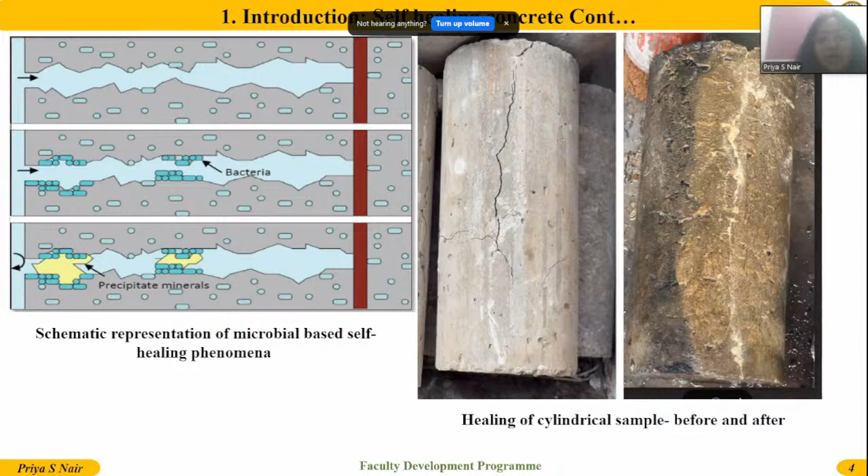So I just put this here for your reference.

There are a lot of literature reviews showing that bacteria is good for the mechanical properties, durability, densification, and reducing permeability. Many other mechanical and durability properties, as well as microbial self-healing properties, are produced by this kind of bacteria. So I'm not going much into the literature part.

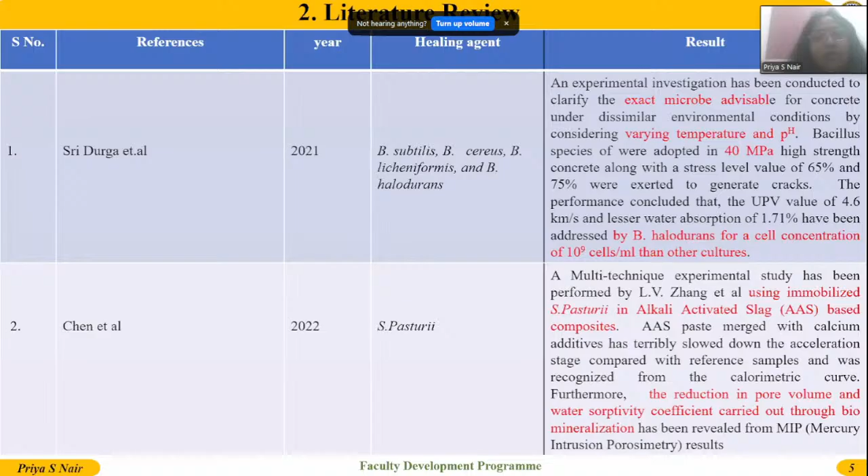Let's go to the next slide. So, research gap - what was my research gap actually in my thesis? I already told you I have taken two types of bacteria. Why I selected this is because most of the existing MICP, microbially induced calcite precipitation studies, rely on individual bacterial strains.

When I went through the literature, I reviewed around 250 plus papers. I noticed that most researchers focused on single strain bacteria. But very recently, I feel around 2020-23 onwards, some people are starting work on mixed cultures.

So what is the problem of single strain bacterial culture? We know that concrete has a pH of 12 to 14. In order to combat that kind of situation, the bacteria should withstand that harsh environmental condition, and we need to check their survivability, metabolic reactions, and precipitation of calcium carbonate inside that system.

So sometimes this single bacterial strain fails to achieve such objectives. Single strain may sometimes fail, so in that case we use co-cultured bacteria. In my research topic, I have taken two kinds of bacteria - one from ureolytic and another from non-ureolytic.

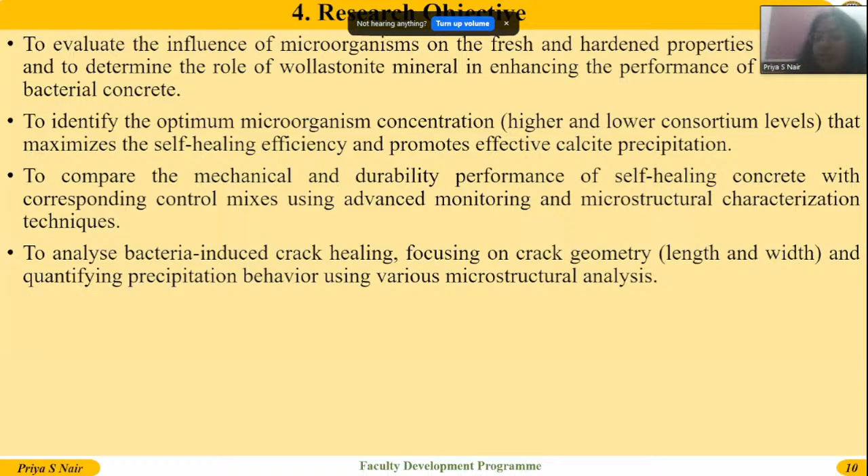The next slide covers materials and experimental program. These are the materials used for my study: cement OPC 43 grade Ultratech, fine aggregate which was natural river sand, coarse aggregate natural broken stone of 20 mm and 10 mm, and mineral additive wollastonite grade Kemolite H-3K, procured from Wolkem Industries Udaipur.

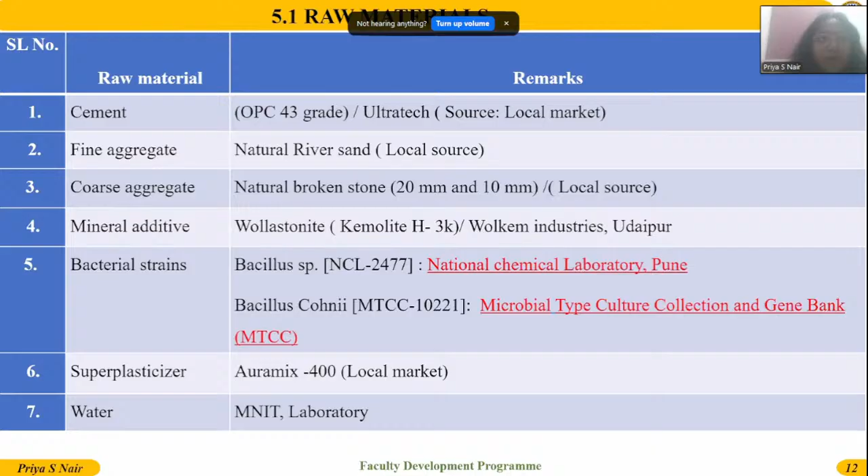Two types of bacterial strain were used: Bacillus sp NCL 2477 procured from National Chemical Laboratory Pune, and Bacillus cohnii MTCC 10221 from Microbial Type Culture Collection and Gene Bank, Chandigarh. Superplasticizer Auramix 400 was used, and water was taken from the MNIT laboratory.

All participants know the physical, chemical and other properties of the ingredients used, but I can discuss a few: fineness 1%, specific gravity 3.15, consistency 33%. Initial setting time was 90 minutes and final setting time was 220 minutes.

These are the aggregates used: 20 mm and 10 mm aggregates, with 60% being 20 mm and 40% being 10 mm.

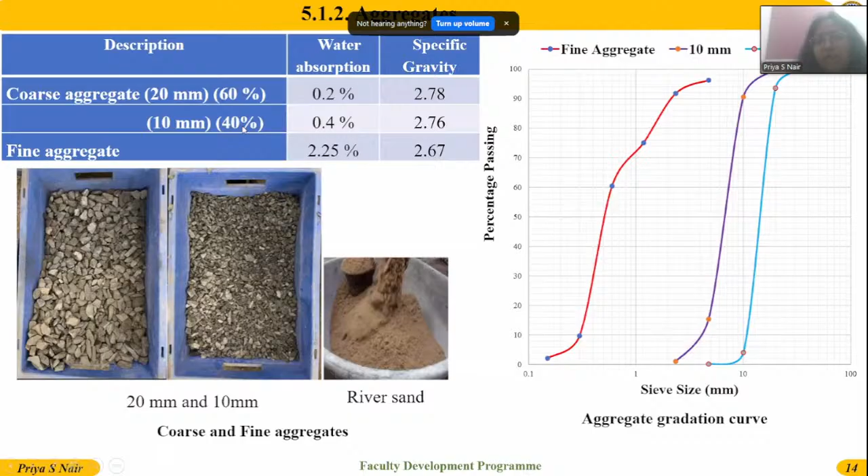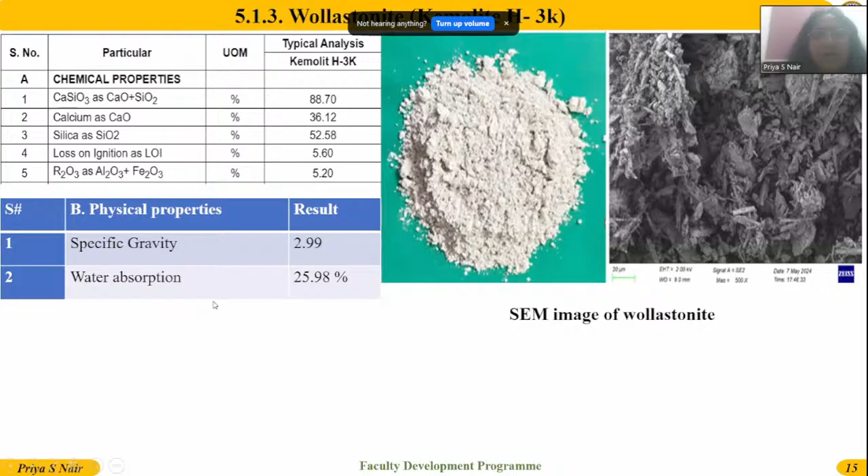This is the image of wollastonite. Its specialty is a needle-like, acicular form. When we use this kind of material, the bridging effect will be higher. It has applications other than concrete, like in paint and flux. Its specific gravity is 2.99, and the main thing is water absorption is comparatively more, at 25.98%.

The mix design was done per BIS 10262:2019, with a water binder ratio of 0.4. Optimum wollastonite used was 10% for this ratio. We conducted trials from 10% up to 50% by weight of cement, and found 10% to be optimum, giving maximum compressive strength. Superplasticizer Auramix 400 was used as discussed earlier.

0.3% was the optimum superplasticizer dosage, determined using Marshall cone test. The optimum consortium culture was 10% by weight of water, also determined through many trials.

Calcium nutrient employed in the current study was calcium lactate pentahydrate, at 1.5% by weight of cementitious material, also optimized through trial. Urea was 1 M, 18 grams per liter, also determined using trial.

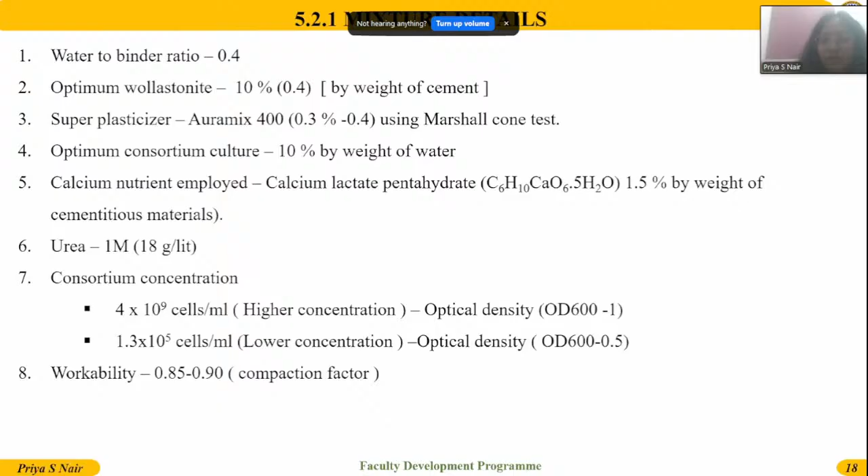When we add wollastonite inside the material, as I mentioned earlier, it affects workability, meaning water absorption is high. Whenever we added wollastonite inside the concrete, the workability sometimes reduced, so the SP dosage was varied. This happened because wollastonite has a larger surface area, so it requires more water to wet the material. So whenever we added the material, the workability got reduced, and that was maintained by adding SP dosages at various levels.

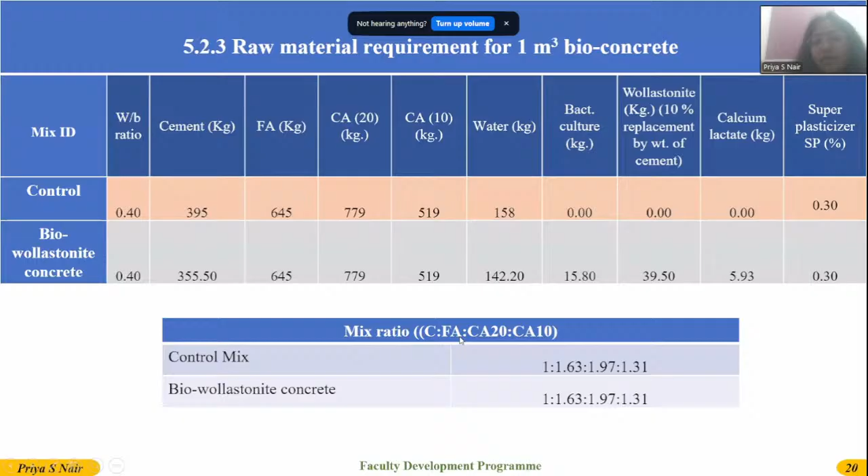So this is the raw materials requirement for 1 cubic meter of bioconcrete. This is the mix ratio: cement, fine aggregate, coarse aggregate 20mm and 10mm. These are the specifications for the mixes.

Next is the experimental methodology study on bacteria. For the study of bacteria, the first step was preparation of the nutrient broth. Before preparing a bacterial culture, we need to prepare the nutrient broth initially. The ingredients inside the nutrient broth include peptone, sodium chloride, yeast extract, HM peptone, and other biological components with the required composition, and it has its own pH of around 7.2 plus or minus 0.4. So before going to the preparation of the culture, it is in nutrient media only, with a pH of 7.2.

The second step is to sterilize the subculture, meaning sterilize the nutrient media. This was performed at 121 degrees Celsius for 20 minutes at 15 psi pressure for the preparation of the media.

This is the test we conducted for checking bacterial viability and related properties. These are the characteristics of the bacteria: first pH, second temperature, gram staining, then ureolytic assay, biofilm, calcite production, and endospores.

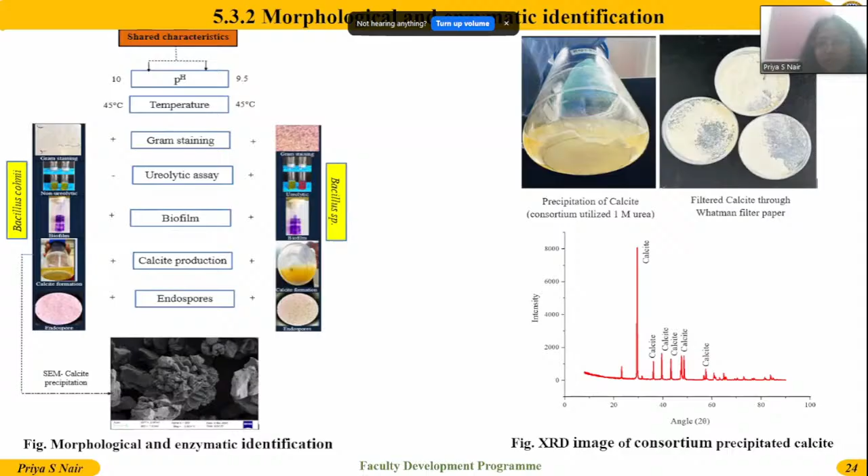So this is the nutrient. I have used calcium lactate pentahydrate. The concentration used in the trial was 0.5%, 1.5%, and 2.5% by weight of cementitious material, added in microbial concrete prepared with a 10% optimum consortium culture without urea addition. We found that 1.5% is the optimum.

These are the preparation steps of the bacterial culture. As already mentioned, we do streaking. Initially, we prepare the media and autoclave it. After cooling, before adding the bacteria, we adjust the pH to 10 using NaOH. Then we place the bacteria inside and put it in the orbital shaker for growing. After orbital shaking, the culture is taken out and the OD is checked using a spectrophotometer. Then it is ready for the production of bioconcrete.

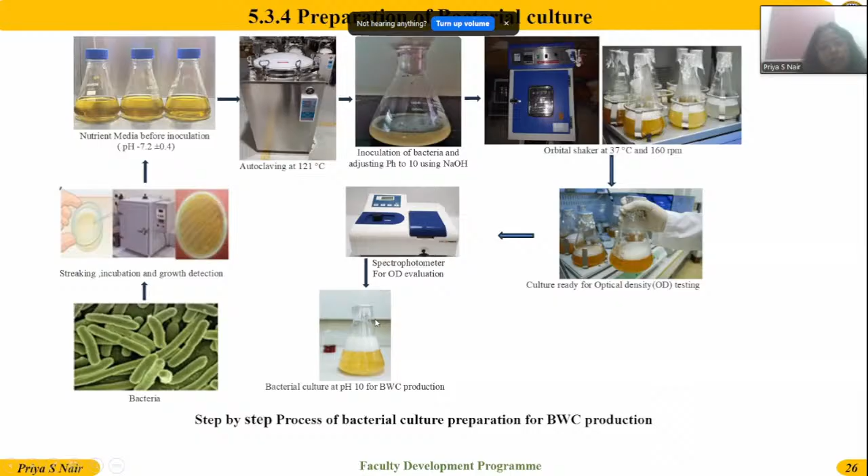These are the preparation methods. We used a cube, beam, and cylinder. There were many other things I could use, but I did not add much because of corrosion and shrinkage testing, everything I had already done. I did not add much because the slides would be too many, and it is very difficult to take the classes. So this is the...

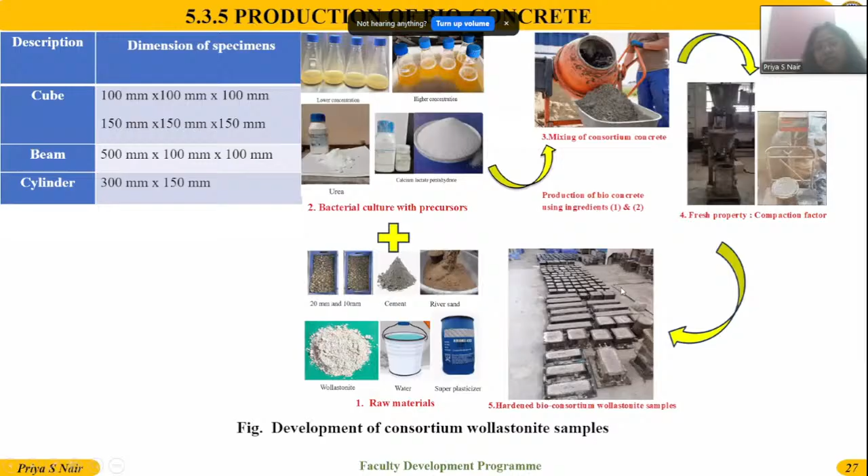Development of bioconsortium. These are the raw materials required. We added the urea and the calcium lactate for the higher and lower consortium concentrations. Then we mixed the materials and checked the workability, moving on to the hardened state of the bioconsortium wollastonite sample.

There are two types of activity I already discussed: ureolytic and non-ureolytic. In ureolytic MICP, urease-positive bacteria are present, which have the capacity to produce urease enzyme. This enzyme catalyzes the hydrolysis of urea into carbon dioxide and ammonia. The ammonia released is highly soluble and dissolves immediately in the water present inside the concrete pores and cracks. The ammonia reacts with water and directly produces hydroxyl ions, causing a rise in pH levels inside the system.

Under high alkaline conditions, the hydroxyl ions convert bicarbonate into carbonate. The bacterial cell wall is negatively charged and can attract calcium ions from outside. After calcium ions are attracted and bound to the negatively charged bacterial cell surface, the carbonate ions react with the surface-bound calcium, causing calcium carbonate to nucleate and grow on the bacterial cells, leading to crack filling and pore healing. This is the main mechanism happening in ureolytic MICP.

There are three polymorphs of calcium carbonate: vaterite, calcite, and aragonite. Of these, calcite is the stable form. First, a crack occurs, then water ingress happens, followed by bacterial activation, urease production, urea hydrolysis, carbonate formation, calcium carbonate precipitation, crack sealing, and finally pore densification.

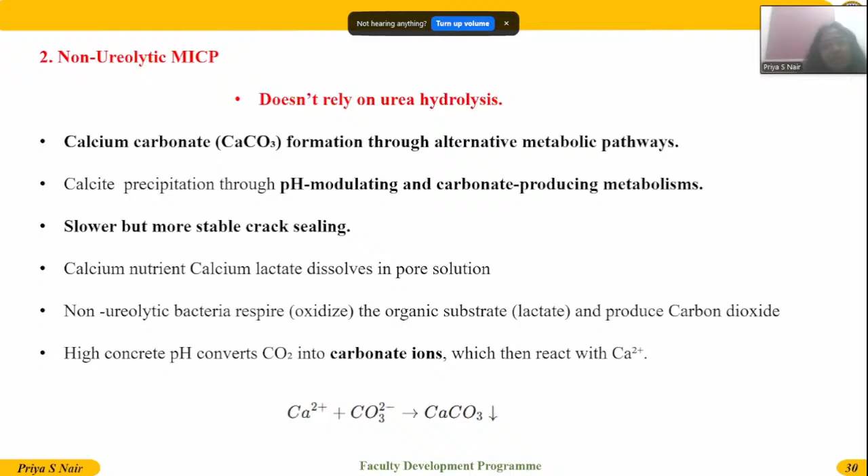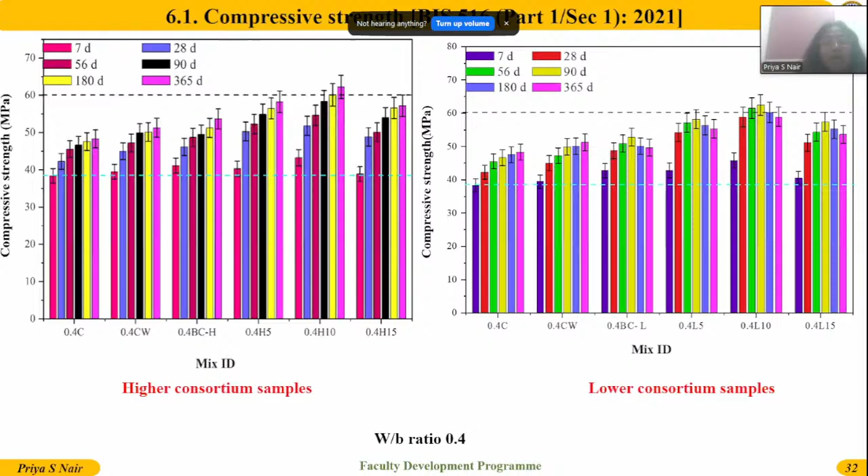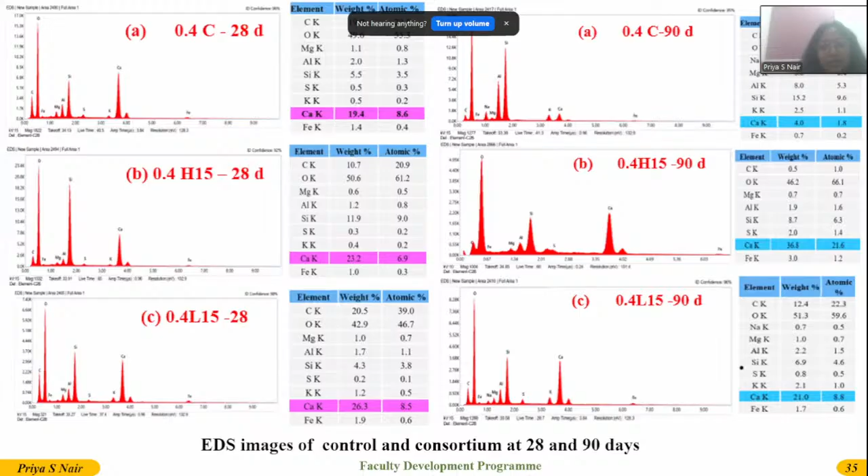So this is the EDS figure. Comparing the EDS at 28 and 90 days, we can see that this calcium precipitation was there.

So it was seen that compared to the control at 28 days, the specimen gave a strength increment of 42%. In the case of lower consortium, it was 42.99, approximately 43%, and higher consortium was 32.87%. So lower consortium gave the maximum result at 28 days.

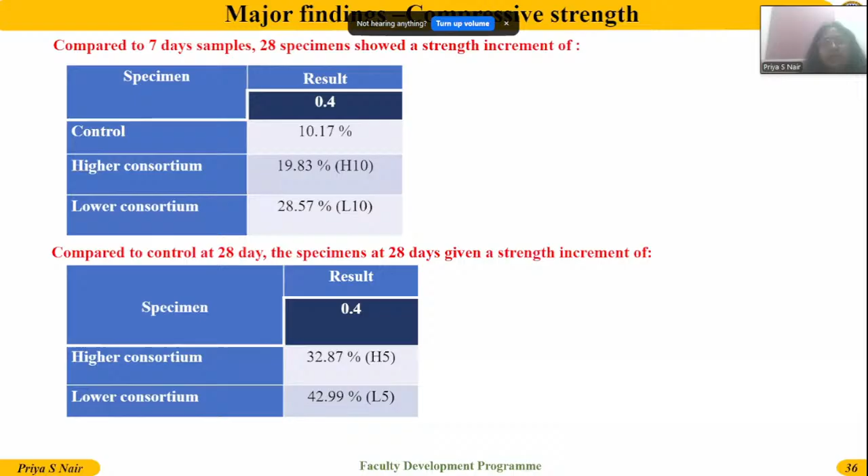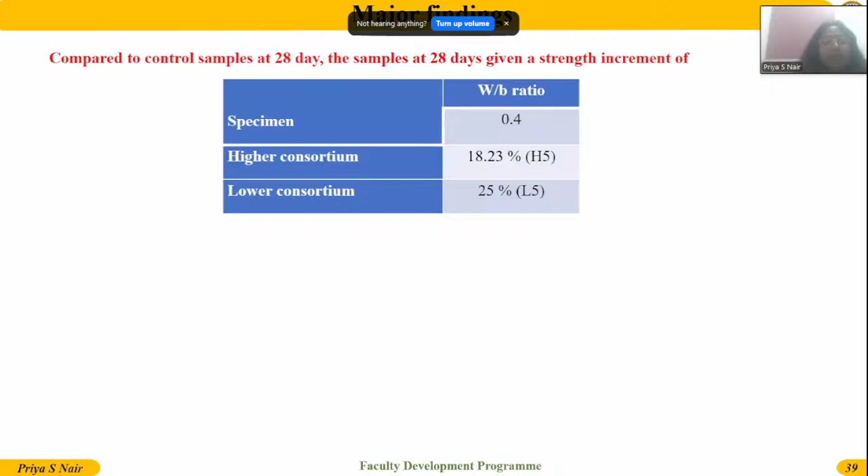Only I added the 28 days result. This is the same trend that happens in the case of flexural also. So in flexural, this is the figure, and lower consortium has given maximum result of 25%, and higher consortium 18.23%. This is the split tensile strength - the same scenario happened there also.

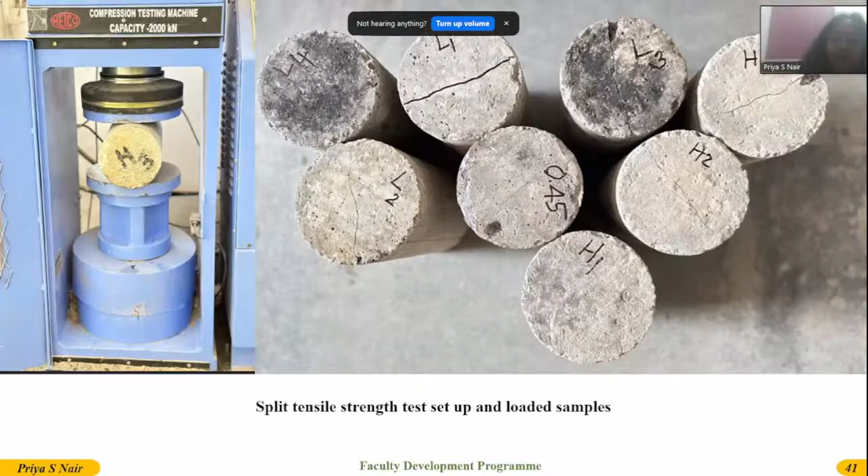This is the figure showing. So the lower consortium has given 31.25%, and the higher consortium has given 25.26%. This is the depth of wear.

So I have done two types of comparisons - 28 days and 90 days strength. Then I noticed that after 90 days, the depth of wear was reduced, and that was prominently seen in the lower consortium samples.

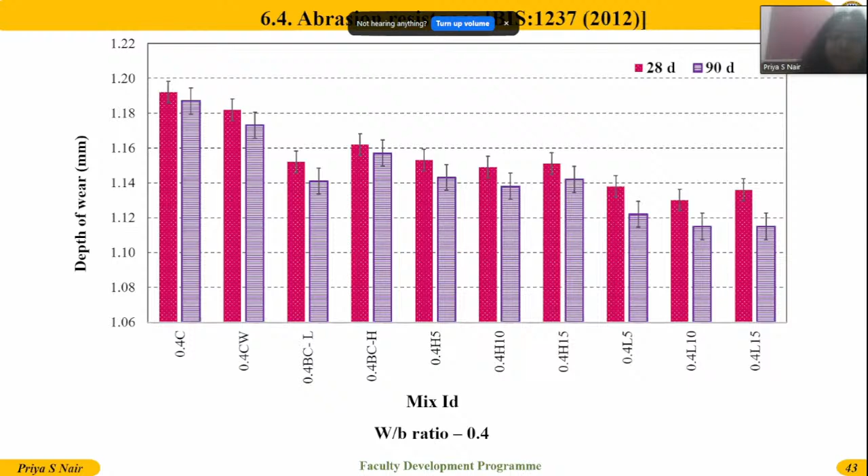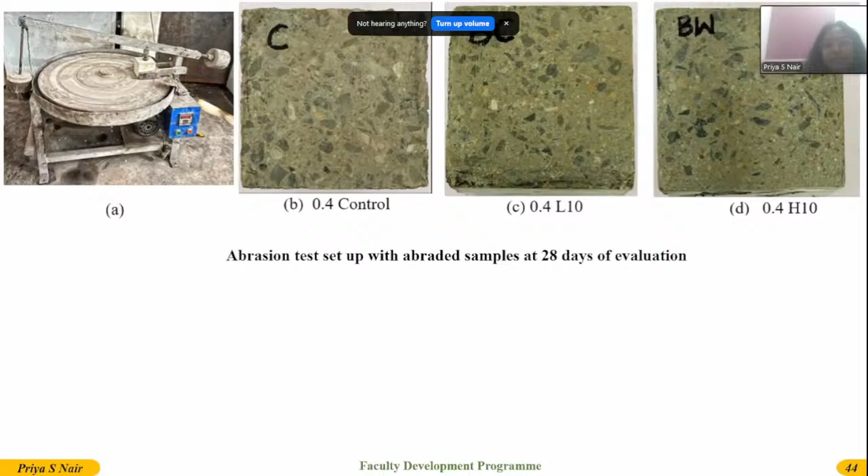This is the sample shown. This is the abrasion testing machine, and these are the samples. How we find out is, initially we take the weight of the specimen. Then after the abrasion, the weight change will declare how much is the depth of wear. There is an equation we use to understand the depth of wear.

So what we get is, comparing control samples at 28 and 90 days, a 0.42% reduction was seen when compared with the control. But higher consortium showed 0.96%, and lower consortium showed a 1.33% reduction.

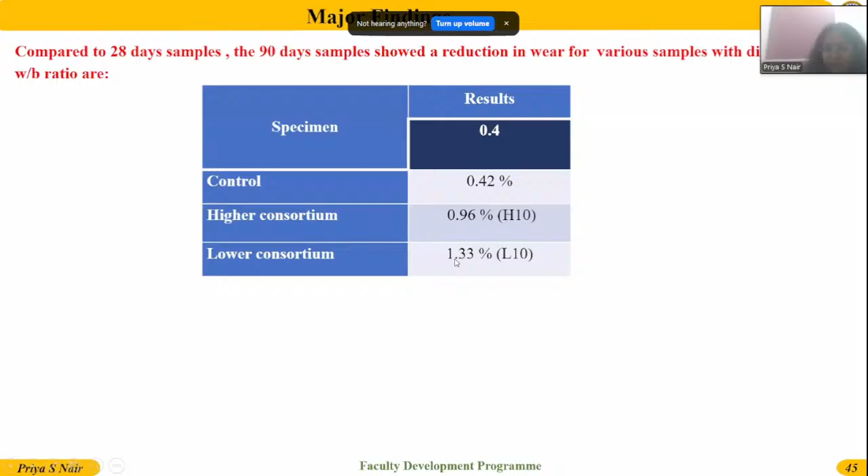So for durability studies, we are going to study water absorption, capillary ingression, resistance to acid attack, chloride penetration, behavior at sulfate environment, and behavior at high temperature.

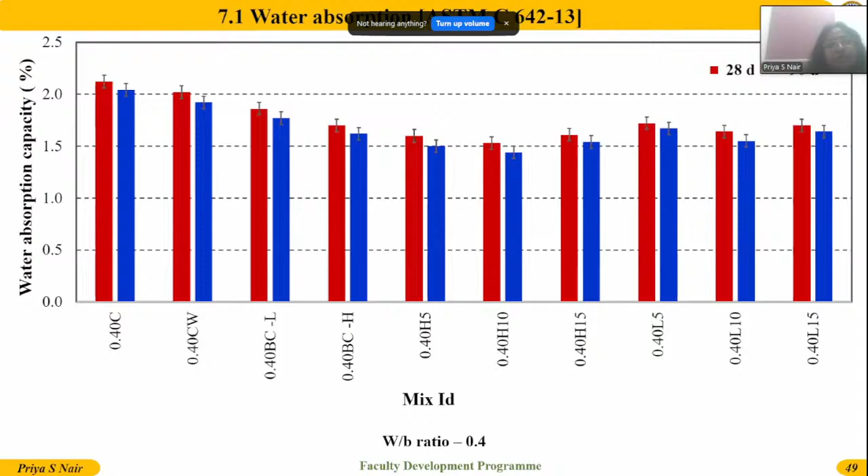Here I am showing the 28 days and 90 days water absorption. It was noticed that compared to 28 days, at 90 days it has reduced in every aspect, and it was mostly reduced in higher consortium samples, because as we told, in the case of higher consortium samples, the durability will be high because the cell density is already higher, and as it keeps increasing, the bacteria has the ability to endure such situations better than the lower one.

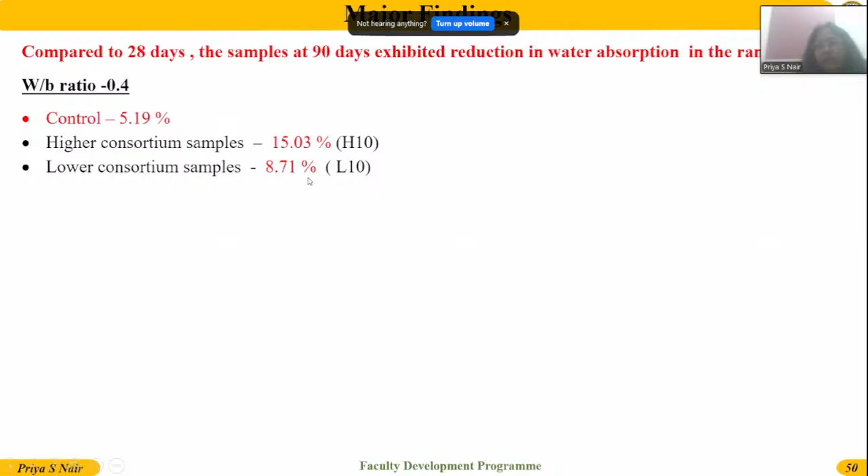So how was the result compared to 28 days? The 90 days sample exhibited reduction in water absorption in the range of: control 5.19%, higher consortium sample 15.03%, lower consortium sample 8.71%. So this is the sorptivity.

Then for sorptivity, we determined the initial and final sorptivity. Up to 6 hours, the initial sorptivity was taken, and after that, up to 6 days, the secondary sorptivity was taken. In the case of higher and lower consortium samples, we saw very tremendous changes. The higher consortium has lower secondary sorptivity than the lower one. This is the experimental way.

This is the sample for sorptivity testing. For the cube, 4 sides will be blocked, plugged with wax or something, and 2 sides we will leave open. So it is placed in water. This figure gives the maximum hint of how we do the sorptivity test.

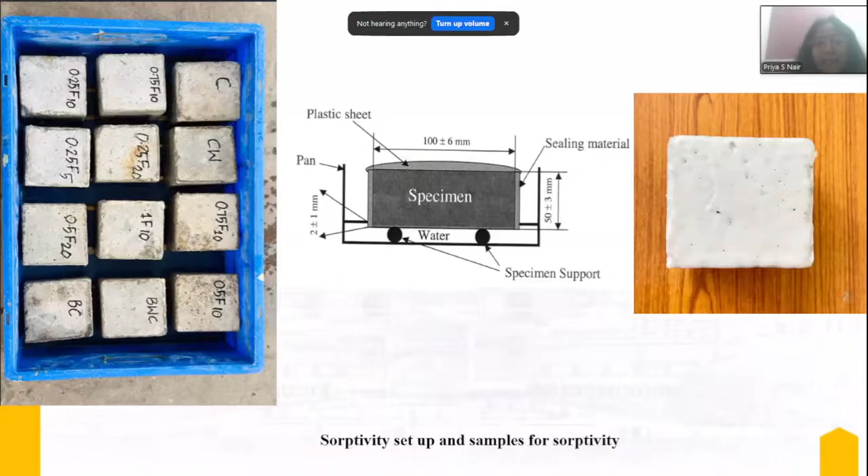The variation in secondary sorptivity was evaluated to assess the long-term surface water absorption characteristics of the concrete specimens. It was observed that by the end of the 6th day, secondary sorptivity had significantly decreased across all samples, with a more pronounced reduction noticed in the bio-treated specimens, demonstrating their enhanced resistance to prolonged water ingress.

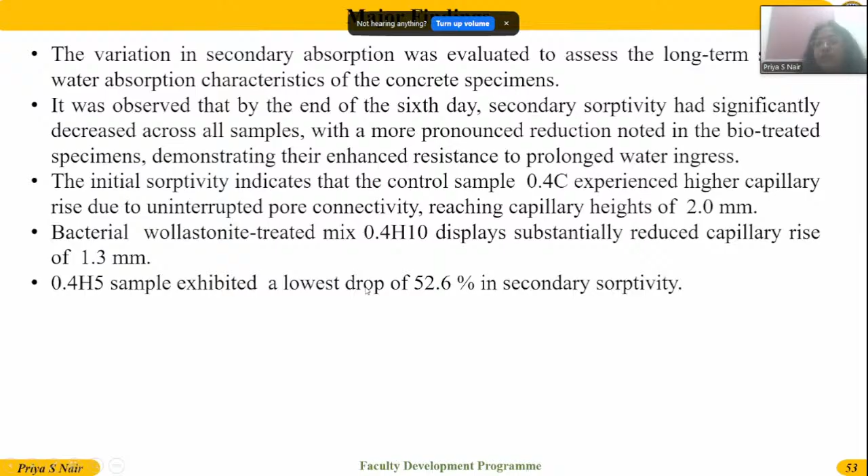In the initial sorptivity test, the control samples showed a maximum capillary rise of 2 mm, but the bacterial concrete showed only 1.3 mm, that is shown as 0.4 H10. Also, the 0.4 H5 sample exhibited the lowest drop of 52.6% in the secondary sorptivity.

Resistance to acid exposure was also tested, including compressive strength and weight change. We placed oven-dried samples in 3% diluted acid water and conducted tests at 28, 56, and 90 days. We checked the strength and weight at every duration, and we observed changes after 90 days.

During the acid test, what happens is the sulfuric acid reacts with calcium hydroxide in the cement to form gypsum. This gypsum is not good; it softens the interior part of the concrete structure, creates pores, and also makes the concrete expand, causing volume change.

When the gypsum reacts with calcium aluminate, which is one of the hydration products present, it forms a needle-shaped morphology called ettringite. This ettringite causes further expansion of the product and leads to major and minor cracking on the surface.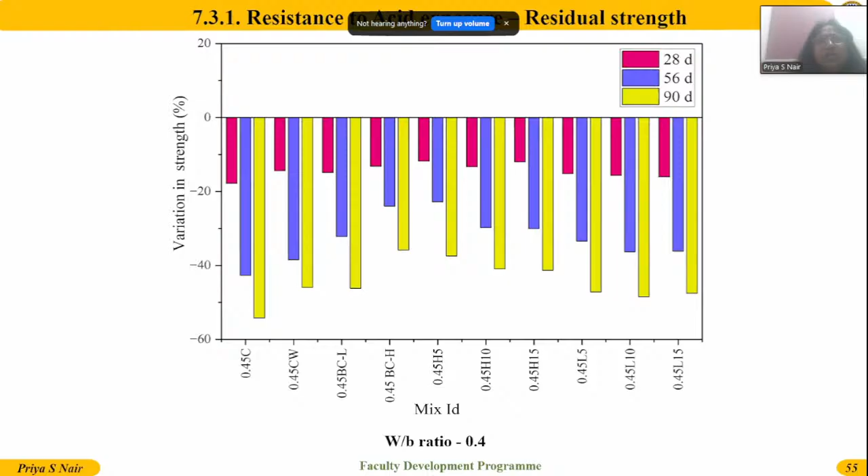In my case, I noticed that the Wollastonite consortium synergy showed a very limited weight change and strength variation. So we can say that MICP is an effective approach in the chemical aspect.

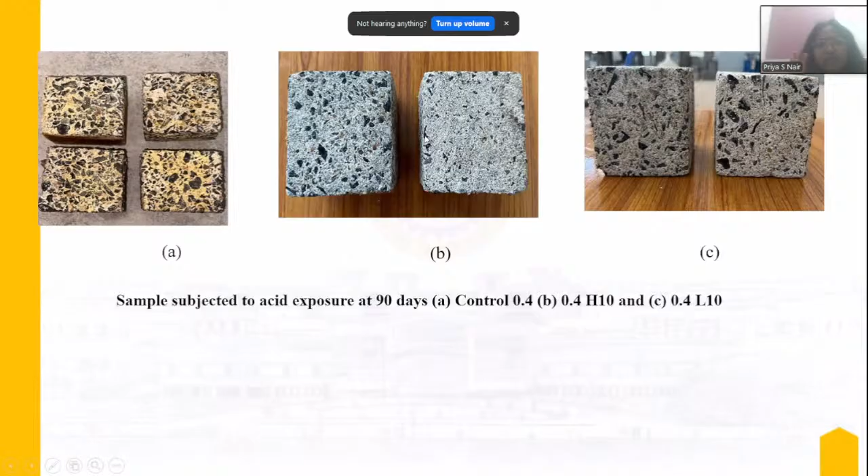These are the images: this is the control, this is the higher consortium concentration, and this is the lower consortium concentration after 90 days. We can see that the control is more vulnerable, more susceptible to this acid attack, but the others are not much affected.

Compared to the 28-day water-cured sample, the acid-treated samples at 90 days showed: the higher consortium showed 35.01% strength reduction, and weight reduction was only 3.12% compared to others.

This is the depth of penetration of chloride, meaning the depth of chloride penetration. We conducted an experiment on chloride penetration. We placed the samples inside a 4% NaCl solution for a period of 28 to 365 days.

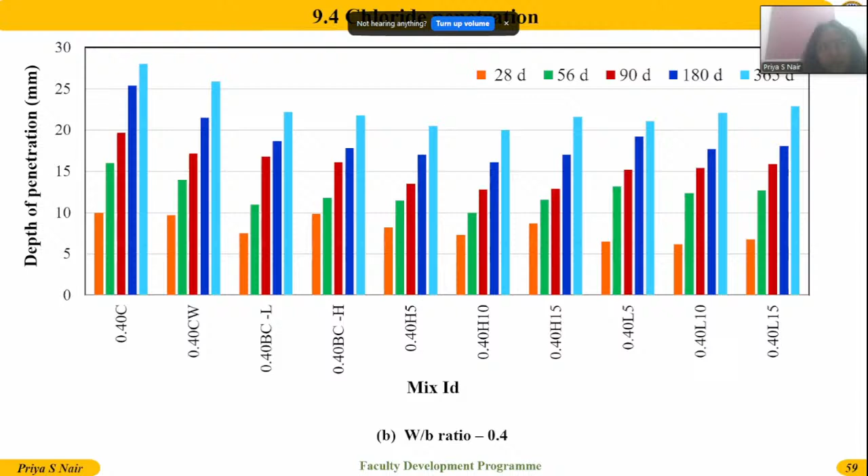At every duration we took the samples out, made two halves, and sprayed silver nitrate over the surface. The samples with chloride ingression show white precipitation. These images show the white precipitation.

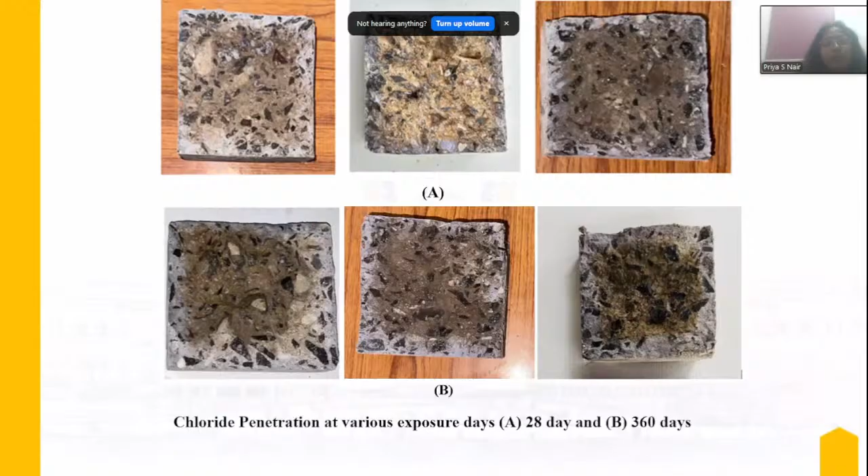We can see this is the 28 days, and this is 360 days. The 360-day samples show much more white precipitation, which indicates the depth of penetration. So we are taking the average of the depth of penetration.

It was noticed that the control sample shows a maximum of 27 mm at 360 days. The higher consortium shows 20 mm maximum, and the lower consortium shows 22.9 mm.

When magnesium sulfate reacts with calcium hydroxide, magnesium hydroxide, that is brucite, is formed plus calcium sulfate. This calcium sulfate later converts to form gypsum, which is not good, as it reacts with the sulfate ions in the concrete plus the aluminate phase to form ettringite.

The magnesium ion attacks the CSH gels and forms a different compound. There it was CSH, and here it becomes magnesium silicate hydrate, which has no binding capacity, and it causes severe strength loss and weight loss.

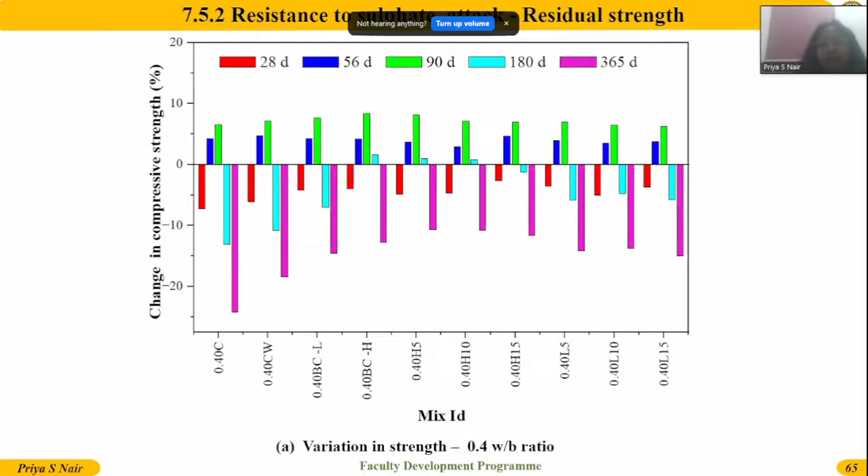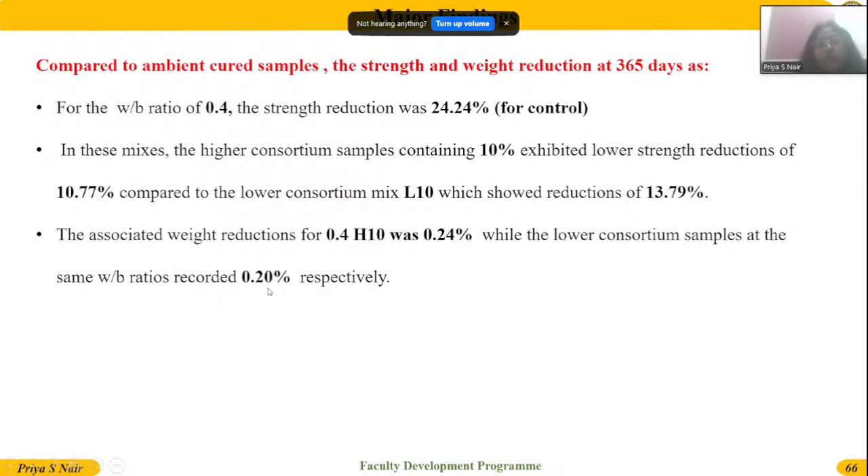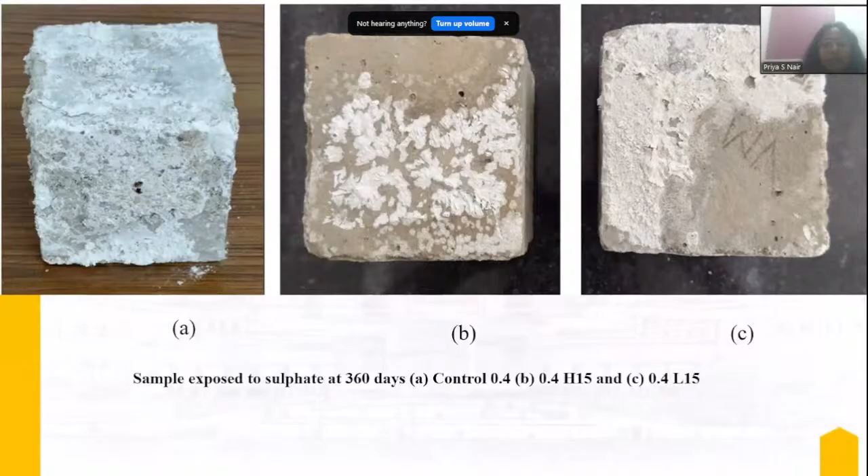These are the images of the control as well as the sulfate-exposed higher and lower consortium samples. I extended my work up to 550 days and noticed that the higher and lower consortium samples did not show any visible changes and were not degraded. Something may have happened inside, but it was not visibly shown as cracks, delamination, or spalling.

There was nothing, so this is the heat. The time is 7:06 now. I do not know how much time I can take because some materials are there, but okay, I can take whatever is needed.

It will make some kind of color change inside the concrete system. So it was seen that at 400 degrees Celsius, the reddish color was noticed, and after that, the concrete showed a gray color at 600 to 800 degrees Celsius, and at 1000 degrees Celsius it was a buff hue. This was clearly noticed.

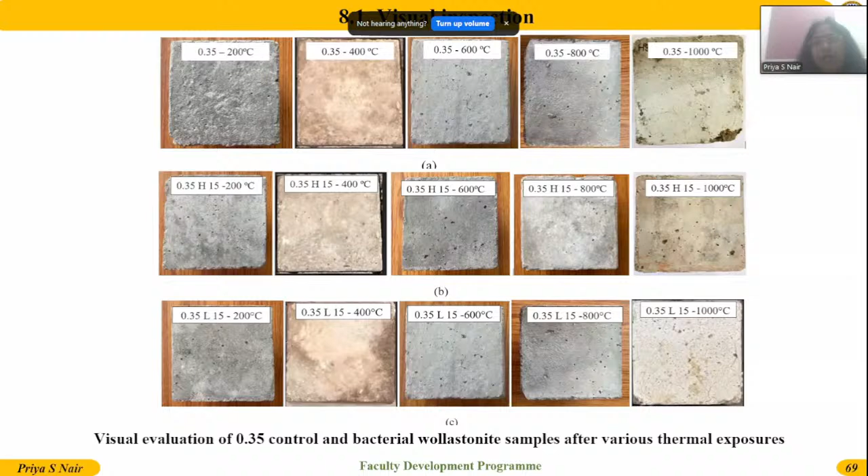So this is the weight change. After the temperature treatment, we can see that the weight change was lower in the case of higher consortium concentration compared to the lower concentration.

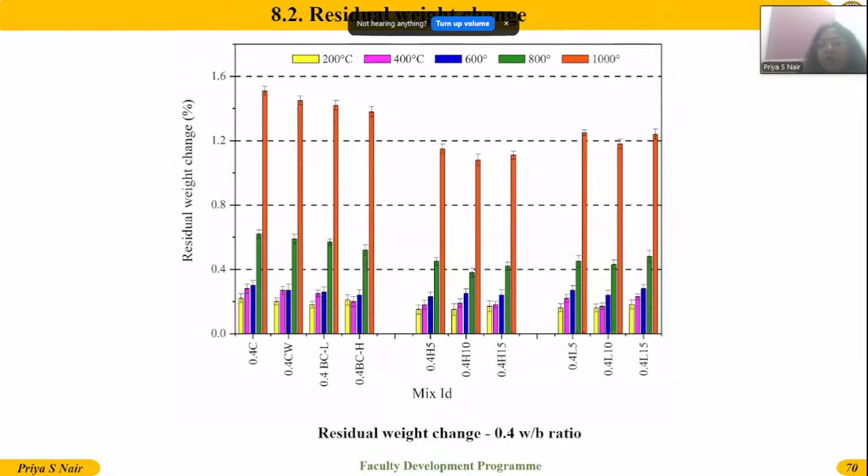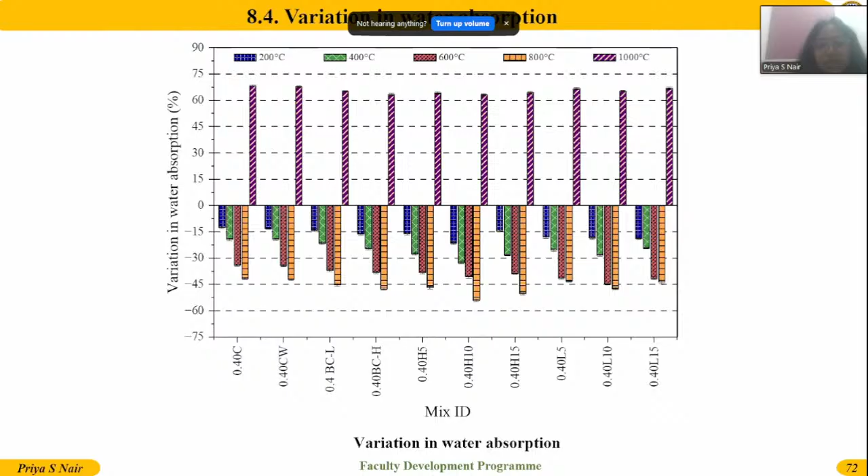Now another thing, water absorption. As I mentioned, bound water inside the pore solution is present in the concrete. So whenever we heat the sample, the pore solution may evaporate to some extent, and sometimes the concrete sample shrinks, becoming tighter and denser. At that time, water ingress gets reduced, and after that it expands, so cracks may emerge, and at 1000 degrees Celsius there is an increase in water absorption.

This is the same criteria for residual UPV. When we look at UPV, we can connect it with water absorption. If water absorption is less, that means there are fewer pores and flaws inside the concrete, and it tightens and holds the matrix dense. After that, it starts showing some UPV flaws, as it has reduced.

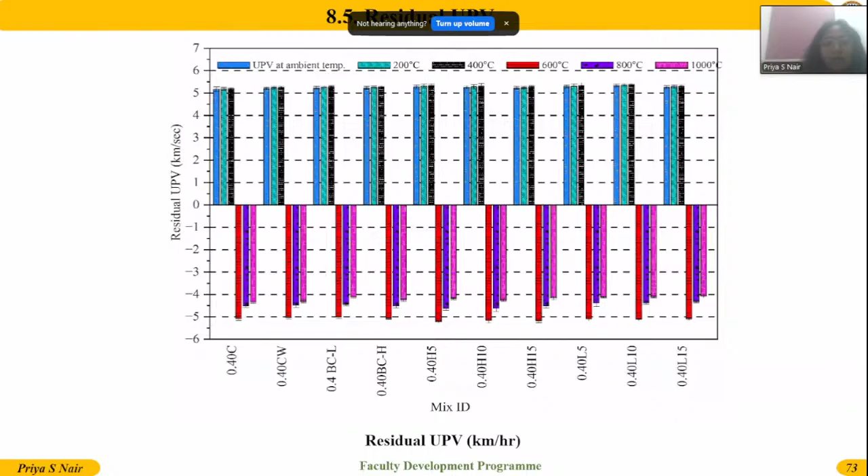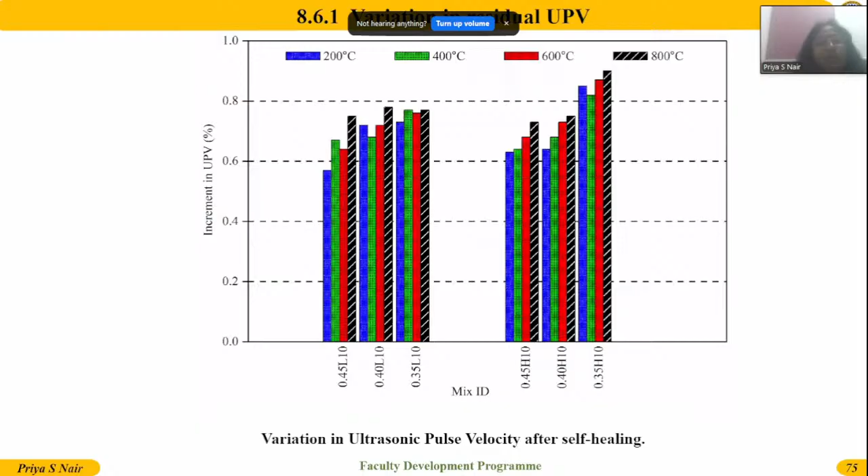So this is the increment in UPV as well. UPV also relates to compressive strength automatically—if the compressive strength increases, UPV may also increase. So it was seen that UPV was also increased.

This is the microscopic observation of the bioconsortium after temperature exposure. As a curious researcher, I took my samples to the laboratory to check whether the bacteria remain viable after this much temperature. I found the interesting fact that up to 800 degrees Celsius, the bacteria was clearly visible. This is the control—initially I took images of the bacteria, and finally I noticed that at every temperature up to 800 degrees Celsius, the bacteria was visible.

Why? Because the bacteria has the ability to create or make spores inside the concrete system. After activity, the bacteria will be dormant inside the concrete system. Whenever it gets a favorable condition, like moisture ingression or something, it will reactivate and produce spores, and can withstand high temperature or harsh environmental conditions. So we can say that this bacteria is thermophilic, thermal resistant bacteria.

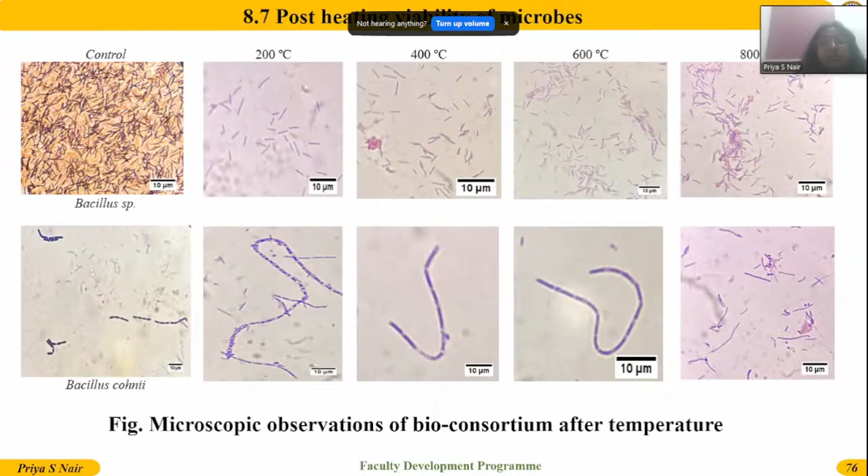So these are some results I already explained. The self-healing studies mainly focused on length, width, regaining compressive strength, and regaining UPV. I have taken two types of cylindrical samples - one for the higher consortium and one for the lower consortium.

I did the cracking at 100% in the compression testing machine, and the cracks are irregular, so we use ImageJ software for analyzing the cracks. I have taken the average crack width of 2.07 mm. So after this, we can see the pre-cracked specimen, healing at 21 days, healing at 42 days.

At 56 days, we can see that the specimen is fully, completely healed. We can see this image, healed with pore reduction. The calcium, meaning the calcite, came outside the samples, and the pores healed completely - you can see the pre-cracked specimen pores and the surface pores, there were no pores visible over the specimen after 56 days in the case of the higher consortium sample.

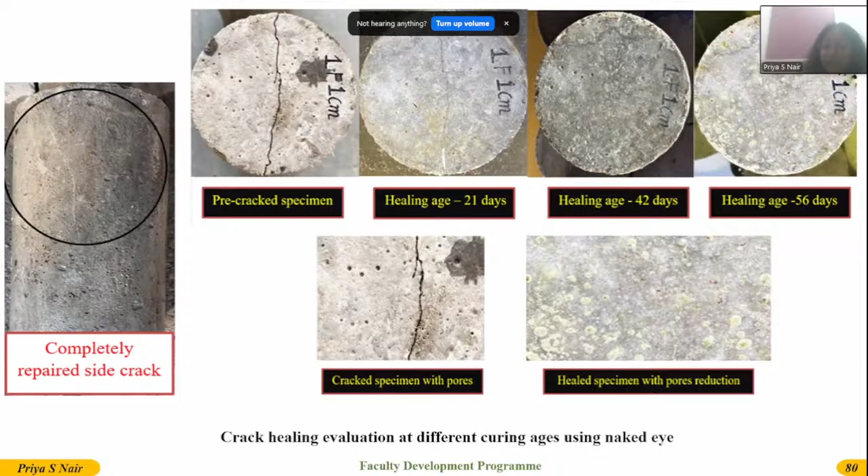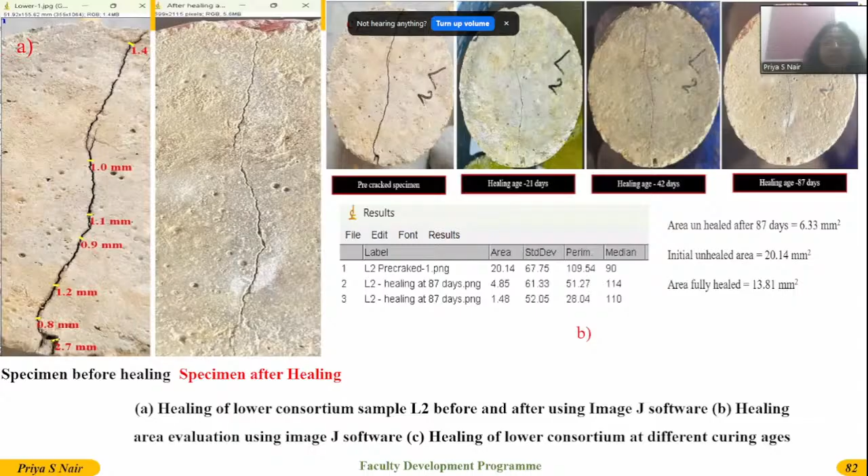This width was 1.3 mm, around 68.57% only was healed up to 87 days.

So I placed some samples in water after compression testing, in the case of temperature, and it healed and regained compressive strength beyond the maximum compressive strength. So it was successful actually.

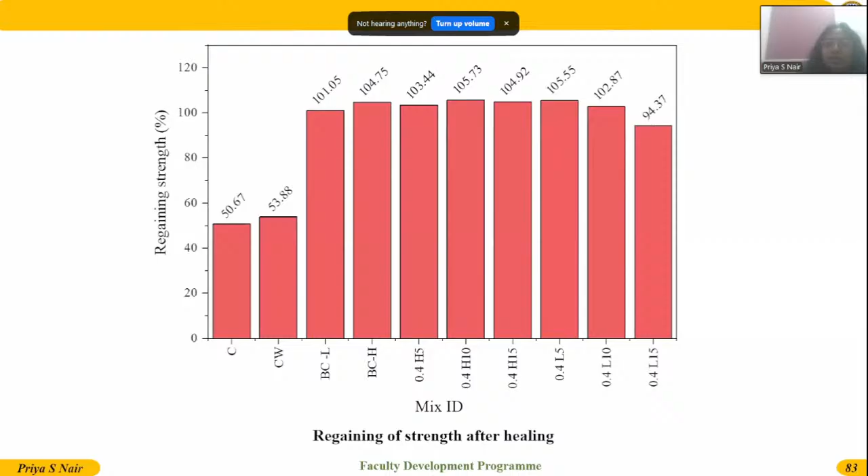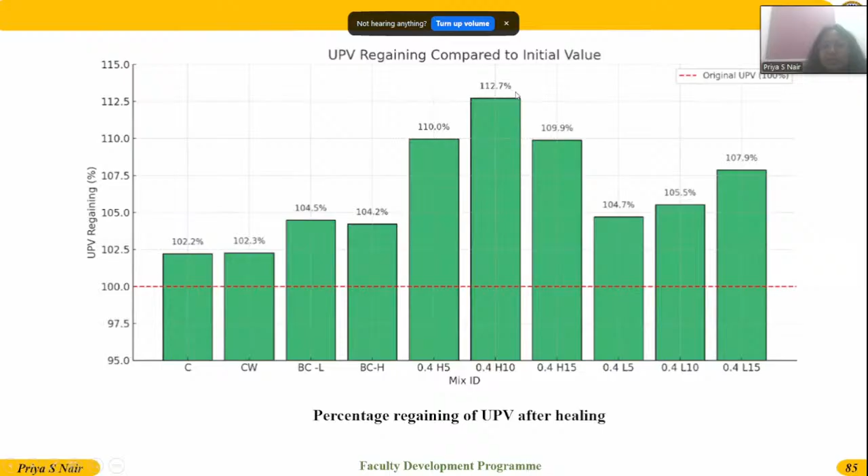This is the UPV before healing and after healing the same samples. I noticed it was healed completely. So this is the regaining - we can see around 112% increment was noticed. So 100% was already there and it went beyond that limit.

So the final conclusion is 2.07 mm - I already told you 2.07 mm was the crack. And what was the diameter? 15 centimeters was the diameter. So 15 centimeter diameter, 2.07 mm average crack width, the higher consortium sample within 56 days has healed 100%.

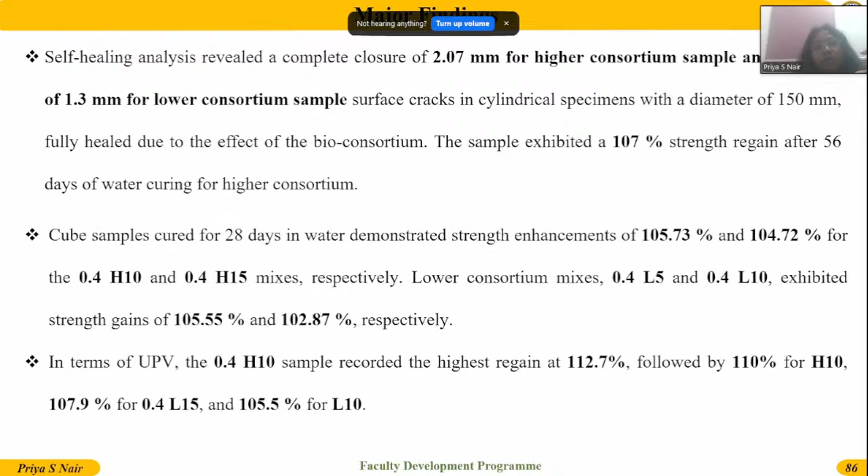But on the other side, the lower consortium sample only healed 68.57% with 1.3 mm average crack width. So what we are getting from this information is, for effective self-healing, we need a particular or specific cell concentration - higher concentration samples will effectively work for the durability part, for durability studies as well as for self-healing, it will heal completely. This is the message we are getting from the final part of the self-healing study.

So this is the overall conclusion. We already mentioned that concrete is alkaline and the bio-based approach demands several precautions to thrive under such conditions. Factors such as temperature, pH levels, nutrient availability, and cell concentrations are crucial in supporting the overall development of bio-inspired concrete.

The next limitation we've seen is that it's important to note that ureolytic bacteria can generate ammonia, but excessive urea poses risk to both humans and structural integrity of the concrete. Determining the precise quantity of urea suitable for the concrete is mandatory. There is no correct protocol for culturing and making bioconcrete - a deficiency in established protocol for producing bioconcrete remains to be determined.

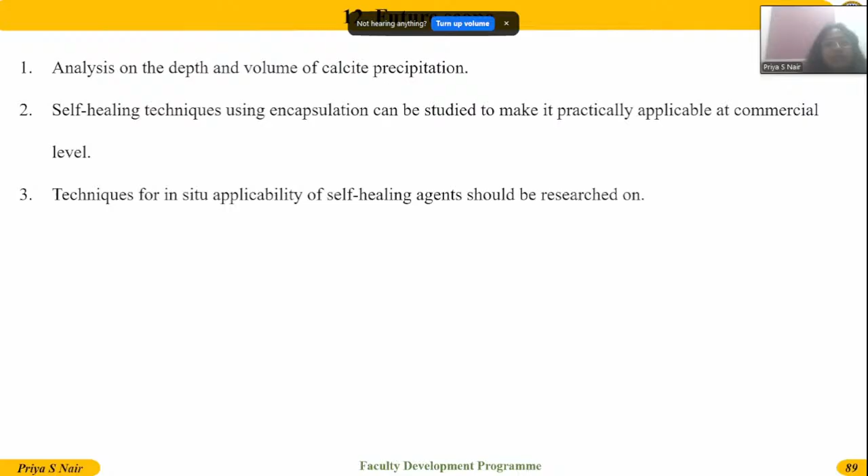I have already discussed this - so this is the future aspect. I haven't seen any papers on volume of calcite precipitation.

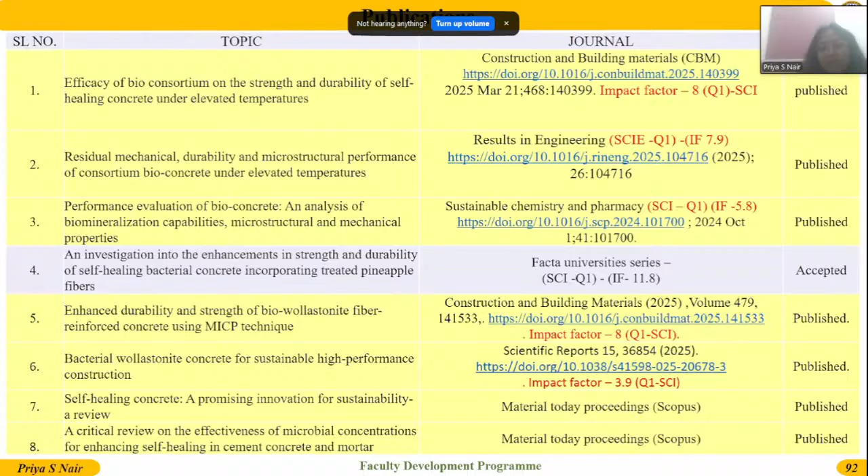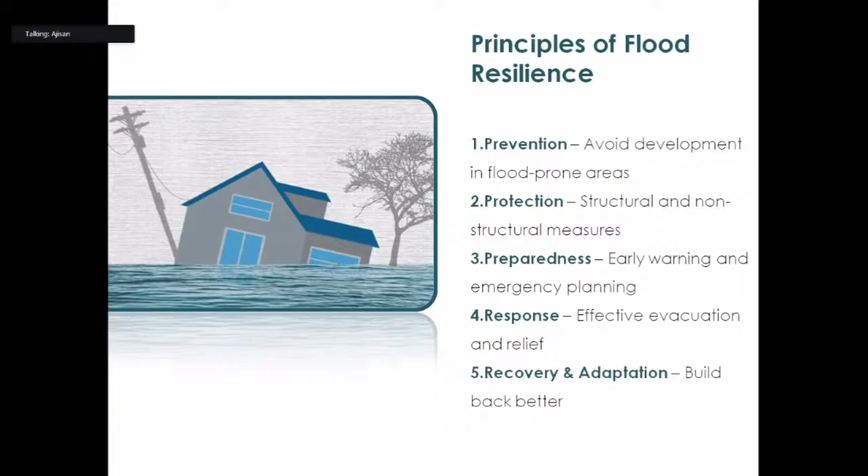Now we have discussed the normal properties of floods. Now we are moving to urban floods. Urban flood is nothing but the flood that happens in cities or urban areas.

The reasons for urban flood may be different from normal flood, and some other additional reasons may occur in urban flood. Nowadays, most of India's coastal cities are experiencing urban floods frequently, because of different reasons. We will discuss all those things.

In urban planning, flood resilience refers to the capacity of cities to plan, design, govern, and adapt urban systems so that flooding causes minimum damage, ensures continuity of urban functions, and enables rapid recovery. That means we know flood will happen - if flood happens, what will we do, and after the flood, how will we come back? That is the meaning of flood resilience in urban planning. So in urban planning, we plan how we will come back to normal conditions after the flood.

Normally, urban flood resilience focuses on three scales. One is city-wide systems, which include land use, transport, and drainage. These are the physical things that cover all those.

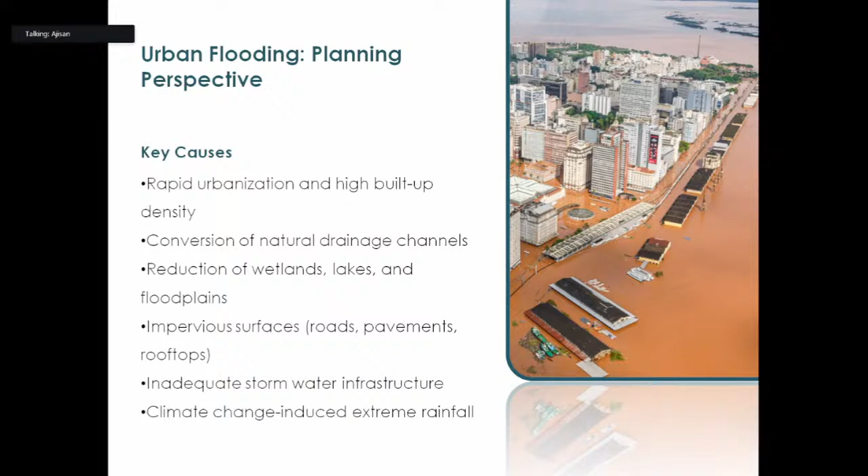Next, climate change, which includes rainfall and monsoon patterns. Next, we move to the role of urban planning in flood resilience—urban planning plays a preventive and regulatory role in flood resilience.

This includes guiding land use away from flood-prone zones. Before planning a city, we have to know where floods will happen or where the flood-prone areas are. In those zones, we should not allow any construction.

If construction or development must happen in that area, it should be based on urban resilient design—for example, we can give parks or agricultural lands in flood-prone areas, but we cannot provide commercial zones there. That is the main point of guiding land use.

This should happen during the preparation of the master plan of the city; that's when it comes into force. Next, protecting natural water systems.

Natural water systems help reduce flooding by integrating flood risk into master plans. We have to find the flood risk areas and the reasons for urban flooding. This is specific for each city, having different criteria and characteristics. According to that city's criteria, we have to find the core element leading to urban flooding in that city, and accordingly plan the master plans, incorporating regulations and planning principles suited to the city.

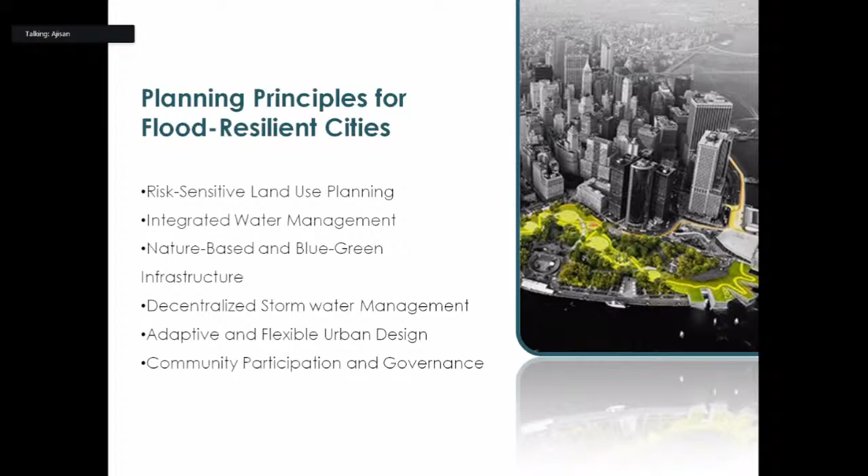Next, we go into detail on land use planning and zoning. Flood-resilient zoning strategies come under floodplain zoning, meaning we give more unbuilt areas such as wetlands and marshy lands. We also provide buffer zones along rivers—green areas near rivers and canals—and plan low intensity land use in high risk zones.

That means if we are planning infrastructure near a flood prone area, the most sensitive area, we have to provide buildings with less risk, like parks, agriculture - these are the things we can give. Next, transfer of development rights.

This is a very important term - transfer of development rights. I will give an example. Suppose I have 10 acres of land near the coastal area, and I have 50 acres of land 20 kilometers away from the coastal area.

In that 50 acres land, I can build up to 50,000 square feet only as per the building rules. But I also have 10 acres near the coastal land, where I can develop 10,000 square feet.

So I am not willing to build 10,000 square feet in the coastal area - I know it is risky. So if I get a transfer of development right, I can use that 10,000 square feet allowance in my 50 acres land instead. That is transfer of development right.

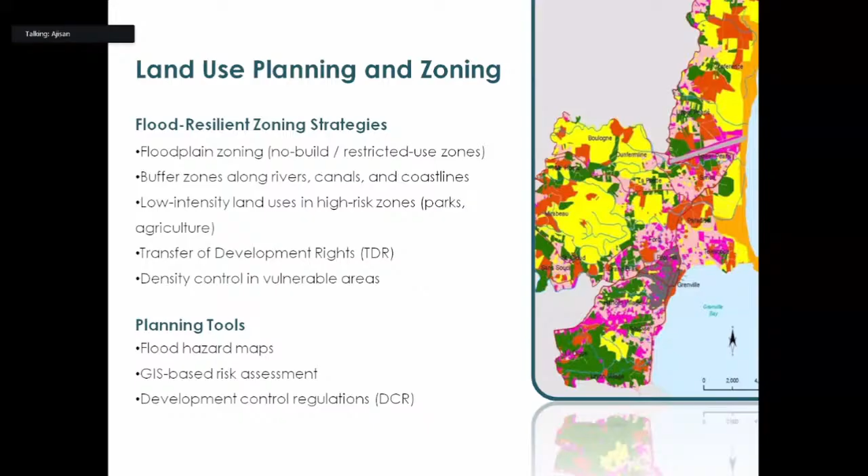Next, development control regulations - that comes under the section of our urban local bodies. They should prepare and provide development control regulations. The master plan, structural development plan, city development plan - all these come under development control regulations, and all have to be decided by the local self-government or municipal corporations.

Next, urban drainage and stormwater planning. This is a common thing - underground drains may allow faster discharge, and be resilient through retention, detention, and infiltration. Retention means they will just store the water. Detention means they will partially allow the water to percolate into the soil. Infiltration means they will allow the water to fully percolate into the soil.

The planning strategies at city level can go through different steps. One is the city level drainage master plan, which includes the city's drainage map, road network maps, and land use maps - all these come under the city level drainage master plan.

It will include the proposed drainages, existing drainages, and drainages to be demolished or repaired. All these come under the city drainage master plan, along with where the slope is, where the natural slope is going, where we should control the water, and where we should discharge the water.

Then, separation of stormwater and sewage - that is also an important thing, otherwise it will cause waterborne diseases and such.

Next, retention ponds and detention basins - that will reduce the chance of flood. Decentralized drainage systems also reduce the chance of flood occurring. Design for extreme rainfall events - if extreme rainfall happens, how do we tackle the situation? That is the question, that is the point. We can design according to the situation.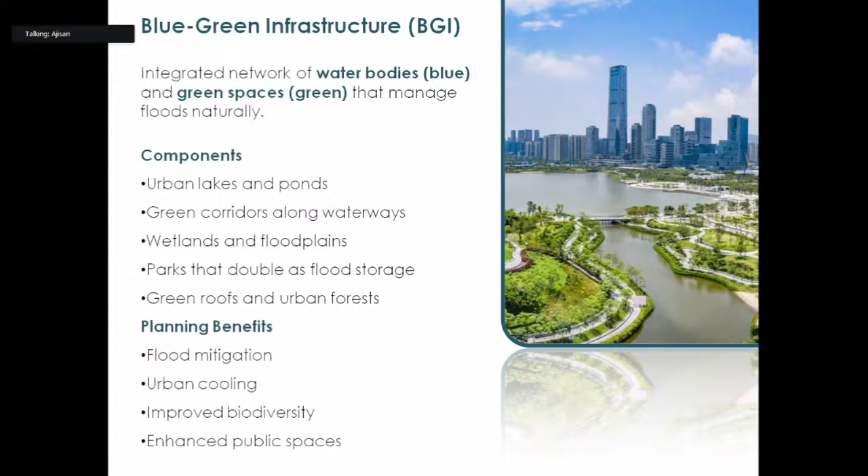The components of the blue-green infrastructures include urban lakes and ponds, green corridors along the waterways, wetlands and floodplains, parks that double as flood storage, green roofs and urban forests. The benefits are flood mitigation, urban cooling, improved biodiversity, and enhanced public spaces.

Next, we are moving to nature-based solutions in urban planning. We have to do river restoration and renaturalization. If a stagnant river is in the city, stagnation of the river may happen and that will lead to flooding. So we have to repair and do river restoration works at frequent intervals.

Wetland conservation and creation. The available wetlands we have to conserve, and other wetlands we have to create for additional coverage or build-up areas that happen during the growth of the city.

Next, mangrove protection in coastal cities, that will also reduce the impact of flood. Next, permeable pavements in the streetscapes, that will also allow the water to percolate into the soil.

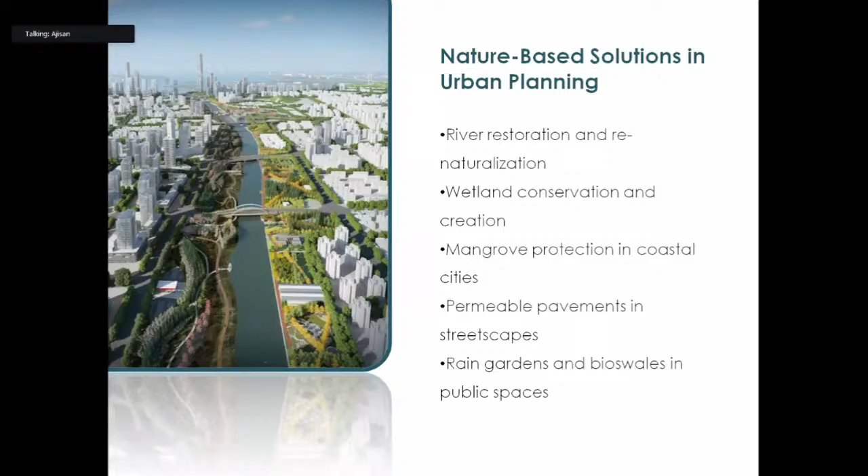Next, rain gardens and bioswales in the public space. The rain gardens and bioswales mean it's just a drainage that will allow the water to naturally percolate into the soil.

Another one is built form and urban design control. We can control the plinth levels, that means the FSI coverage and all those things. If we reduce the plinth level, automatically the coverage will be less. If the coverage is less, automatically the green spaces will be more. So we have to incorporate these minimum plinth levels.

That means incorporating high rise buildings, enhancing or supporting the construction of high rise buildings will be good. Next, ground coverage and controls, same thing only.

Next, setbacks from water bodies, that comes under CRZ regulation, coastal zone regulations. We have to keep some minimum distance while going for building construction, a minimum distance from the coastal zone.

Next, mixed use zoning for quicker recovery. Normally while planning a city, we give some commercial area, public spaces, open spaces, activity areas, residential areas and all. So while going for flood resilient planning, we have to use mixed use zoning because all those things will come in a mix.

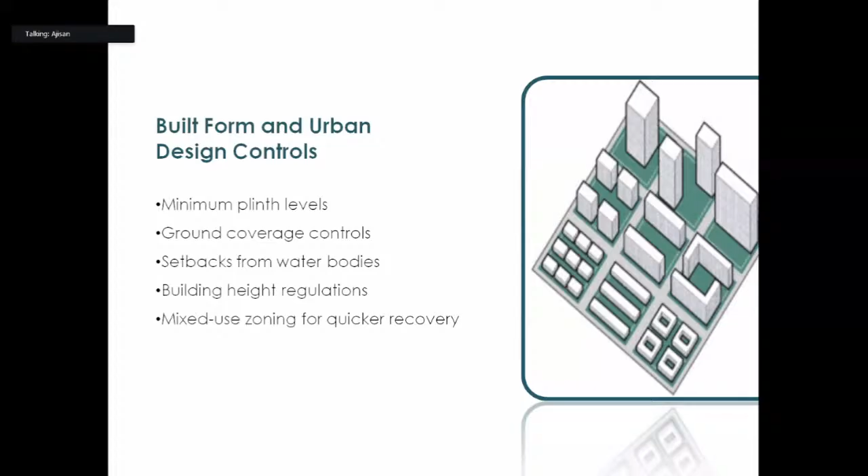Next, coming to transport and infrastructure planning, elevated roads in flood-prone areas help in less damage to roads and infrastructure. Flood resilient metro and transit stations - newly constructed metro stations should be resistant or resilient about flood.

Protection of critical infrastructures, hospitals and power stations - these should be protected from floods. Then redundant and alternative access routes, which also comes under the preparation of the master plan.

Next, informal settlements and equity. Normally informal settlements means the slums and all will come under that - in situ upgradation with flood safe design.

That means in slums and all, we cannot control the growth of slums, it's not easy to control. So we have to plan the relocation of the livelihood to some other places. That is also another key point.

And affordable housing in safe zones. That means we have to relocate the people who are living in slums or near the coastal zones, to some other place along with their livelihood.

Next, urban governance and policy frameworks. These points involve integration of flood resilience in master plans, smart city proposals, and climate action plans. In the master plans, we have to plan all those things accordingly, and under the master plan, we have to create smart city proposals detailing drainage systems, infrastructure, and development control rules.

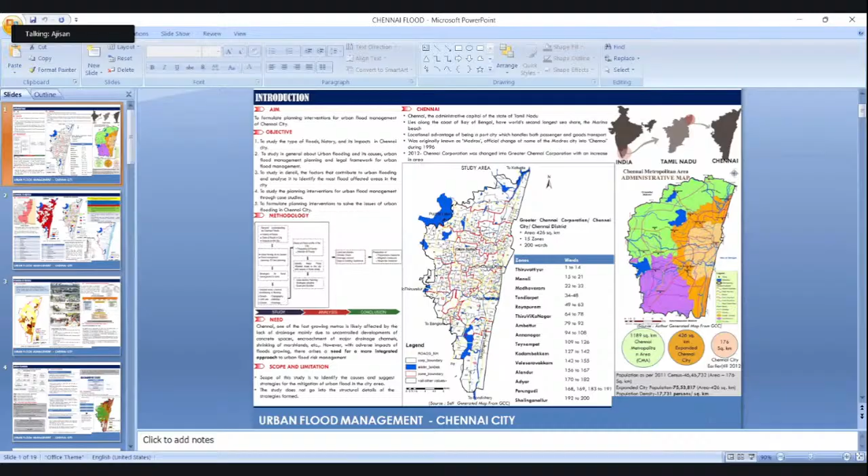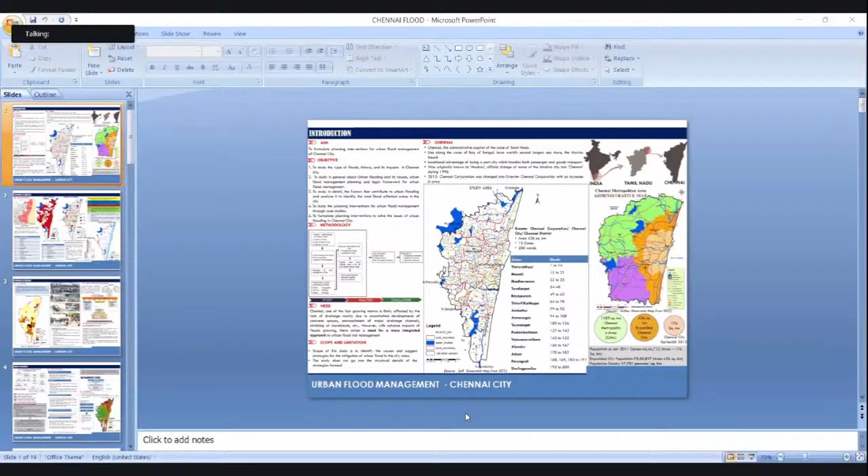Now it's ready, yeah? No, hello sir, this is not in slideshow. No, sir, can you close and open again? Yes, yes. Now it's in. Yes, sir. Okay.

Now we are going to the urban flood management of Chennai city. I'm going a little bit fast, so I will briefly explain how the study will go and how we will find the proposal frameworks. I'll give a brief idea about how we can plan a city flood resilient, or how we can find the proposal frameworks.

The aim of the project was to formulate planning interventions for urban flood management in Chennai city. The objectives of the study include: to study the type of floods, history, and its impact in Chennai city; and to study in general about urban flooding and its causes, urban flood management planning, and legal framework for urban flood management.

The third objective is to study in detail the factors that contribute to urban flooding and analyze it to identify the most flood affected areas in the city. Next, the fourth objective is to study the planning interventions for urban flood management through case studies. The final objective is to prepare and formulate planning interventions to solve the issues of urban flooding in Chennai city.

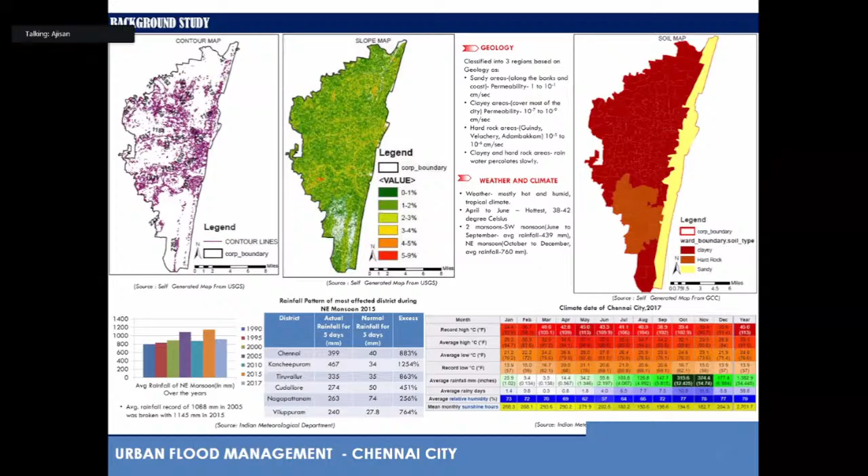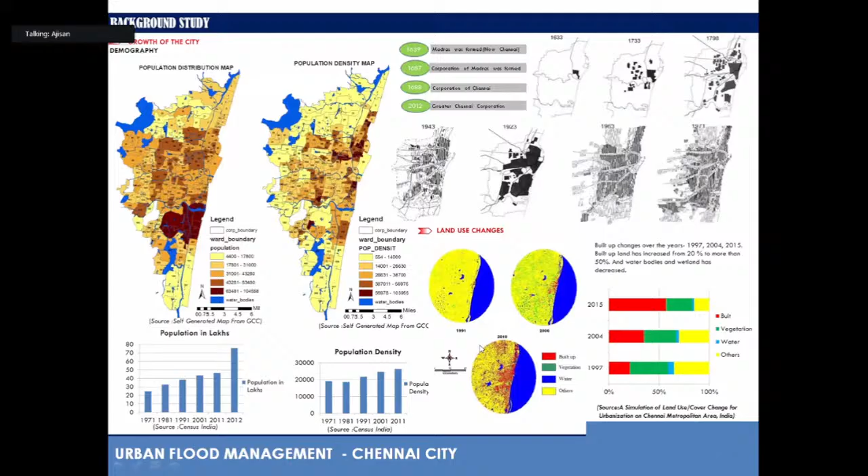At last, we found demography details, drainage details, slope and contour maps, geology and soil conditions. All these things we will incorporate in the weighted overlay analysis.

I'm not going to detail what weighted overlay analysis is. This is one kind of analysis used for the analysis of urban flood resilience - there are different kinds of analysis. In the weighted overlay analysis, we can give weightage to each condition.

For example, for one factor we can give weightage of 10%, for drainages we can give weightage of 20%. According to our study and interpretations, we have to give the weightages, and according to the given weightages, the analysis will happen.

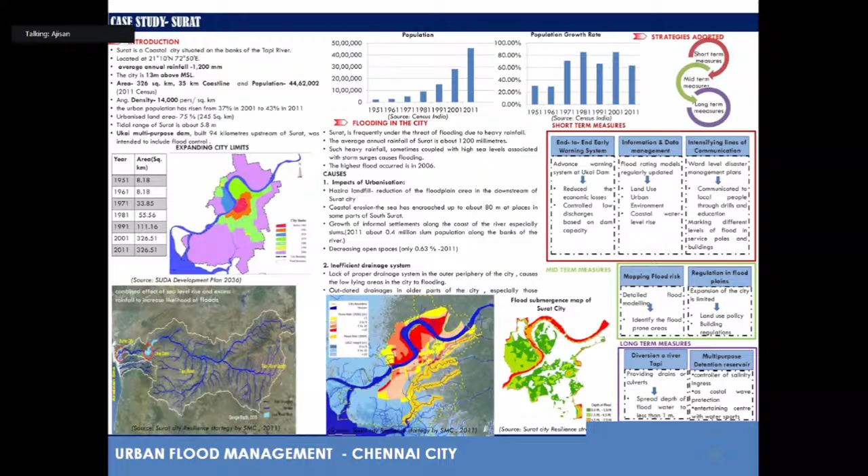After our analysis, we found Adayar and Velachery were the most sensitive areas, and we have to prepare more frameworks for those areas. I'm directly skipping a few slides. These are all the case studies we studied - Surat, Mumbai - these cities were studied for preparing the formulation of urban strategies. We have taken Surat and Mumbai as examples.

Finally, we have come up with an analysis and inference. In that analysis, we found there are natural factors and man-made factors that lead to urban flooding - I'm not going to detail that. In the proposal frameworks, we have divided into 5 phases.

One is the preparedness phase, mitigation phase, response phase, relief phase, and restoration phase. I hope you have understood these 5 stages - we have already discussed some of these stages before.

Okay, in the proposal frameworks, we will find interventions and strategies. We have to provide some early warning systems. So if heavy rainfall will happen, we have to give awareness to the people that heavy rainfall will occur in a few days, so you have to be prepared.

And a unified agency for flood management. This unified agency was not present in Chennai city. So while flood is happening, the government people will not know who will handle these things, who will control these things, who will give instructions to the people. These things will lead to increase the intensity of the flooding, and this will lead to delay of the restoration phase also.

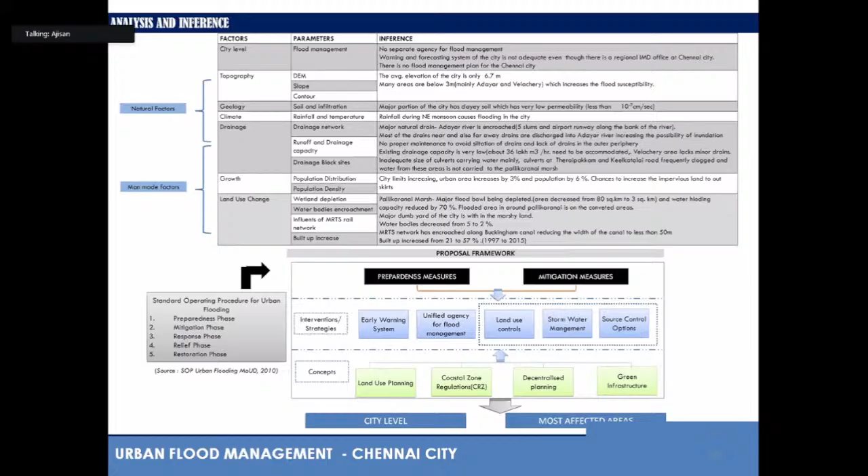So in the preparedness measures, we have identified a separate agency for flood management in Chennai city. Flood warning, flood forecasting - these all things should happen in Chennai city. Next, in the mitigation measures, densification of drainage networks - we have to improve the drainage system and control the land use, because now the most flood prone area is the most populated area, that should be decentralized. Then only we can control the impact of the flooding. Next, source control options.

That comes under green infrastructures. Green infrastructures such as buildings with agriculture, parks and open spaces, more open spaces, green parking, wetland areas should be increased. These things should be incorporated in the zoning regulations, urban local bodies master plan, and city level development plans.

These are all the proposals that we have made. I'm not going in detail with the proposals and the study, I'm just giving a brief about how we can go about the urban flood resilience study. That's all I've prepared in the slides.

If you have any doubts or clarifications, you can ask right now. Hope you people are clear about all those things, and hope you got a general idea about what urban flooding is, or what all things we have to take care about while designing a building, a township, or a city. Hope you got some general ideas about these things. If you wish to ask any questions, you can ask right now.